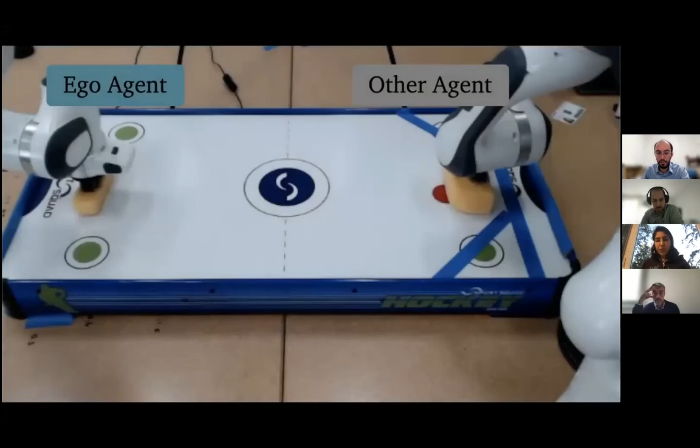So the assumption that we're putting in here is that there exists a low dimensional representation that captures the interaction. And if I learn that, I can also capture the interaction and I can coordinate better. And I can even use that for better adaptation when I think about coordination changing over time, like Bob and Alex getting better at the construction task. And that brings me to this work that I'd like to talk a little bit about. And after that, I'm going to switch to Erdem to talk about learning from interactions.

All right, so the setup that we started looking at was a robotic setup. We have two robots that are trying to play a game of air hockey with each other. I have a robot that I'm calling an ego agent, so this is the robot on the left. And I have another robot that I'm calling the other agent. The reason I'm calling it other agent is that the paradigm I'm talking about could actually work in both collaborative and competitive settings. There's nothing special about this that could only work in collaborative or only in competitive settings. So I don't want to call it an opponent or partner. I'm just calling it other agent.

And we're getting these two arms to play a game of air hockey with each other. And the policy of the other agent is actually high dimensional, right? The robot arm has 7 degrees of freedom. Each degree is a joint angle that lies in a continuous space.

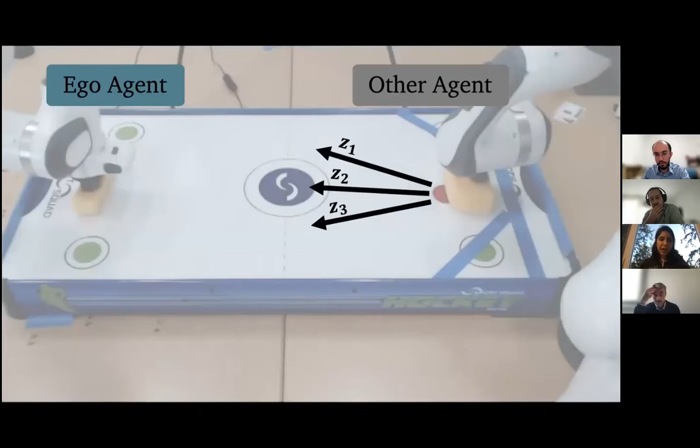And the thing that this ego agent is really observing is not even that, but if it were to observe the actual actions of the robot arm, it would be high dimensional. And if it wanted to do belief modeling over that, it would be over a very high dimensional space. But at the high level, I'm telling you that this other agent is pushing the puck towards the left or right or the center. This ego agent doesn't know that, right? It doesn't really even observe that.

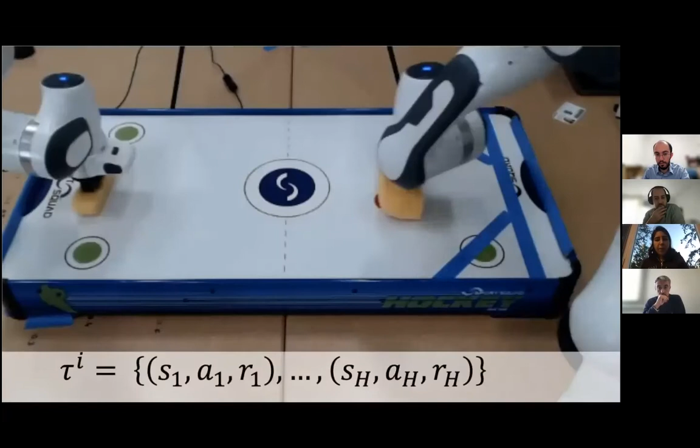But I'm telling you guys that the other agent has this policy that has this low dimensional structure in it. It's pushing the puck to the right, center, or left. Okay? And what the ego agent observes instead is a trajectory. It's a sequence of states, actions, and rewards: states of the world, its own actions, not even the actions of the other agent, but it also sees the reward. If I was able to block the puck, or what is my distance to the puck? And that is what the ego agent observes over some particular horizon, some particular episode.

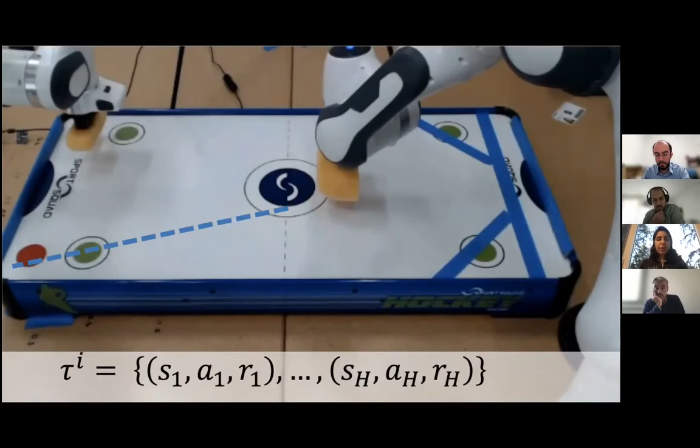Okay? And then this other agent, as I was telling you, has this low dimensional representation. Its policy is pushing the puck to the left or center or the right. And the way it decides is based on what happened in the previous time step. So if the ego agent was able to block the puck, it's going to push the puck towards a different direction. So it has a very simple policy. But again, the ego agent doesn't really observe that.

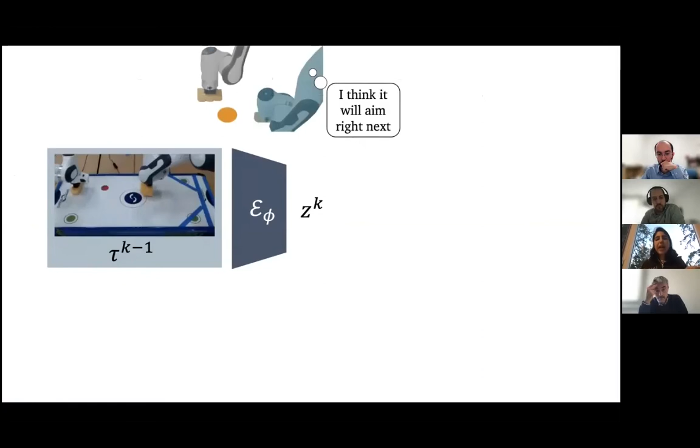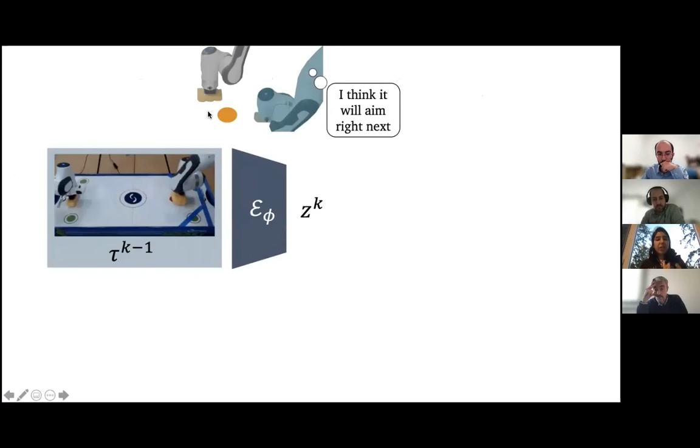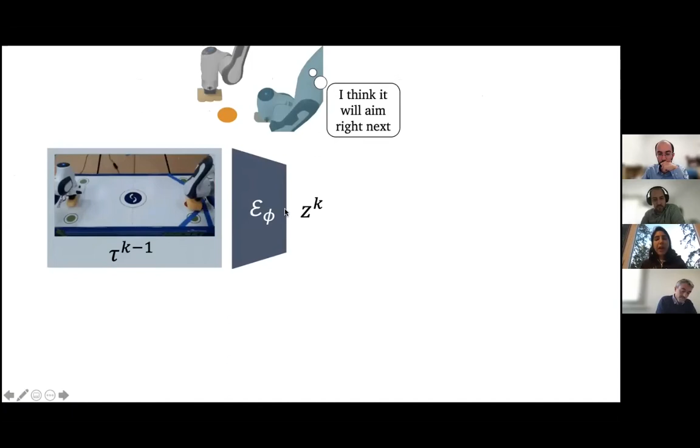So what we are proposing here is to get the ego agent to actually learn this high level representation that I was talking about. The way we can do that is we can look at a previous trajectory, an episode at time step k-1, and try to encode that into a low dimensional representation, Z_k here. And I'm calling this Z_k a latent strategy or latent intent because it's a low dimensional representation of what the other agent is trying to do. This is what the ego agent thinks the other agent is going to do next. Is it going to push the puck to the left or center or the right? That notion of left, center, and right is the thing that's going to be captured by Z_k.

And how do we actually ensure that that will be captured by Z_k? Well, we're going to try to decode this Z_k into the next trajectory, into a prediction of what will happen next. So our learning objective here is really a prediction loss. We look at a previous trajectory, we try to predict what will happen next. And for me to be able to predict what will happen next, I need to know the state, I need to know my policy. Those are the things that I already know. But I also need to know how the other agent is acting and how the other agent is influencing the state. So I need to know the policy of the other agent.

So that is the thing that is going to allow me to really predict the future. But I also enforce that representation to be low dimensional. So I capture the sufficient information, the sufficient statistics about the other agent through this representation learning component. Okay, so that's really the key idea of this work. Once I have that representation, I can use it however I want, right? I can use it in any planner. I can do model predictive control with that representation, or I can have any other controller that uses that representation.

What we decided to do was reinforcement learning. So for our planner, we decided to have a reinforcement learning component that tries to come up with policies for our ego agent. And this reinforcement learning component is maximizing the expected return, but this expected return is dependent on the representation that we have learned so far, a representation of the latent strategy of the other agent. And this algorithm is called LILI, Learning and Influencing Latent Intent. The idea of it is to iteratively train a reinforcement learning agent that's trying to come up with a policy for the robot, and a representation learning component that's trying to capture what the other agent is trying to do.

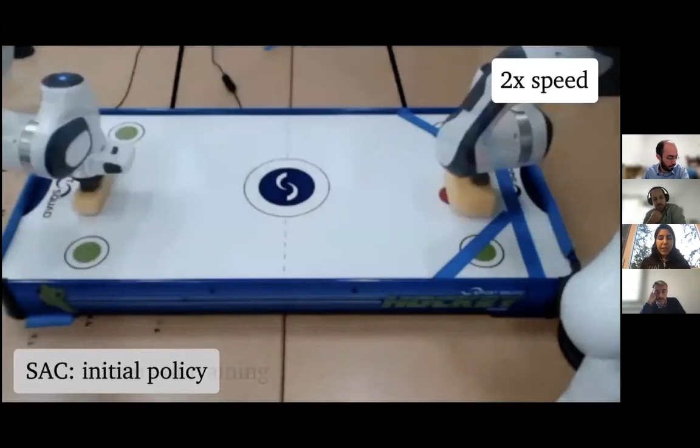So if I were to use, let's say, soft actor critic, state-of-the-art reinforcement learning, after 4 hours of training, it's able to learn how to block a puck. It generally just learns blocking a puck. If it goes towards one direction, it's able to block the puck. But it doesn't model the other agent, it doesn't capture a representation of the other agent. And because of that, it always goes towards one direction. So for example, in this case, it always goes to the left.

And in terms of success rate, soft actor critic is around 40% success rate. It always blocks to the left in this case. It should really be like 0.33 success rate, but it gets lucky 40% of the times, and it's able to block the puck in those settings.

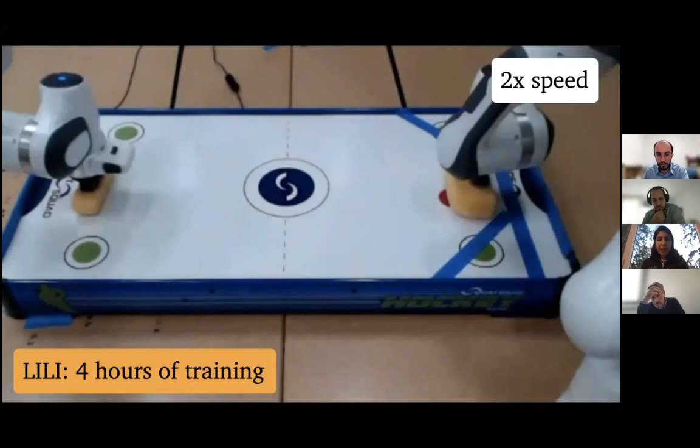But if you're using our algorithm, LILI, after 4 hours of training, LILI is able to actually predict a model of the other agent, predict this latent strategy, a low dimensional model of the other agent. And based on that, it's able to block the puck, and it gets a success rate of around 90%, which is pretty good. Okay. All right, so that's all great, right?

So I've talked about learning representations. One can really think of this as an orthogonal perspective to that game theoretic modeling, in these more reactive policies. We are learning a low dimensional representation, and that captures the model of the other agent. And using that, we are able to train a reinforcement learning agent that can coordinate.

But one interesting point that I also want to mention here is that I can go beyond reacting to other agents. I can go beyond simple coordination. Specifically, if I optimize for a long horizon objective, I can maximize, for example, expected return across multiple interactions, and that would allow me to influence other agents. So not only can I coordinate with them, but I can get them to act in specific ways that are useful for me, that can help me as an ego agent to play better, win the game more, get higher rewards, and so on.

And I want to briefly talk about this idea of influencing. Here, the way we are doing influencing is by just considering a long horizon objective. So instead of considering my original objective, I'm now considering it across multiple interactions, and that could get me higher rewards. So as an example here, we are able to influence the other agent, this robot, to push the puck more often to directions that are useful for us.

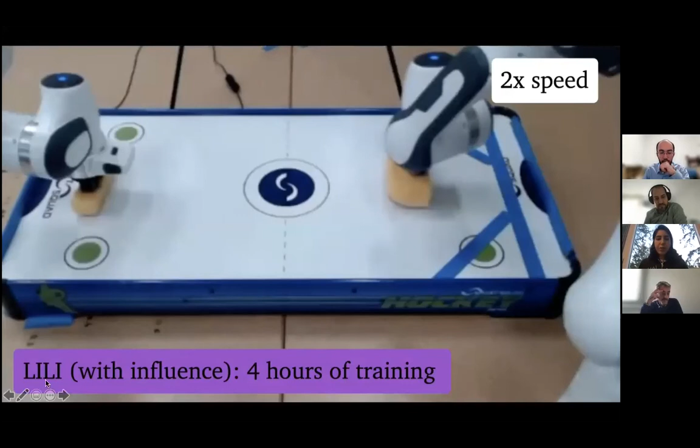And we kind of see that in this other paradigm, the air hockey paradigm, right? The thing that we get is that the puck is more often pushed to the left. That is the way of influencing that we are seeing here. Okay? All right, so that's all great, but one other interesting point is that influencing can allow us to solve reinforcement learning problems in a more effective way.

So in a recent work, I want to very briefly mention this, and then I'm going to switch to Erdem. This is a CoRL 2021 work. What we are looking at is influencing to actually help with reinforcement learning and multi-agent reinforcement learning problems. One of the biggest challenges in multi-agent reinforcement learning is the non-stationarity of the environment, specifically the non-stationarity of the other agent. Multi-agent reinforcement learning is notoriously harder than single-agent reinforcement learning, because you need to model what the other agent is trying to do.

And this idea of learning latent representations is trying to have a more efficient way of capturing that. What I've talked about so far with LILI is, let's try to learn representations, because that is a more effective way of capturing that non-stationarity. But the interesting thing is with influencing, maybe you can remove that non-stationarity fully, or maybe you can reduce that non-stationarity.

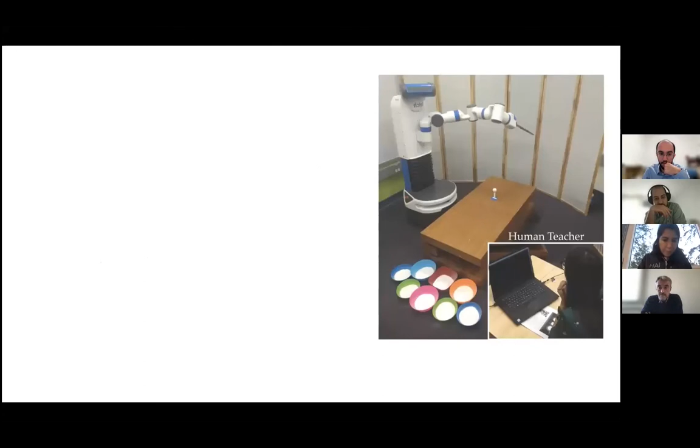So far, I've basically talked about this idea of learning and influencing interactions. But in the second part of the talk, what Erdem would like to talk about is this idea of learning from interactions. So if you think about it, if you have a robotics agent, that robotics agent can learn from human demonstrations, but it can also learn from many other sources of data and leverage those different sources of data to actually be able to coordinate and to learn various types of policies. All right, so with that, let me stop sharing and I'm gonna let Erdem take over.

Okay, thank you, Dorsa. So as Dorsa mentioned, we want to learn humans' underlying reward functions through some interaction. And our insight here is that it might be difficult to get data from humans, but humans leak information everywhere, and maybe we can be a little bit smarter about how we are collecting data from them. Let's think about a robot trying to do a task like picking up an object, as in this picture. Ideally, one way to achieve this is to write out a reward function and ask the robot to optimize it. But this is often difficult because these reward functions are not easy to design by hand.

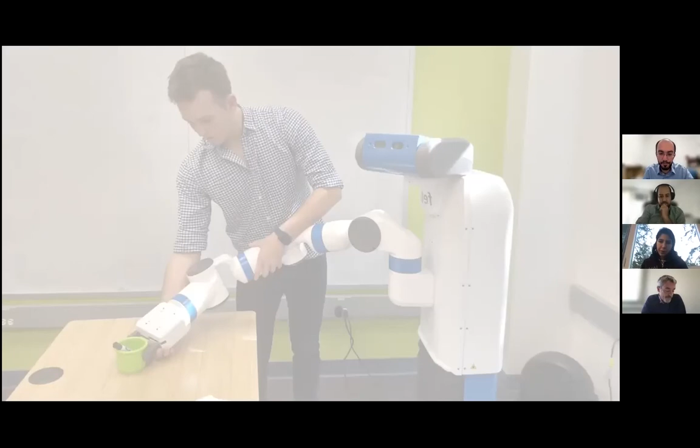And another way of doing this is to have a human provide a set of demonstrations on the robot and ask the robot to try to imitate this human as closely as possible based on their demonstrations. This idea is often known as imitation learning or learning from demonstrations, and it has been around for more than 2 decades now. And most of the field has been looking at this idea of learning reward functions from expert demonstrations, where we assume access to an expert who can provide us with a large number of demonstrations that are almost perfect. And then the robot can basically imitate those demonstrations, and that's it, we are done.

But in reality, we don't really have access to these perfect expert demonstrations. If we want to train with humans, we are not going to be able to ask the humans to provide us that much data or provide us near optimal expert data. In reality, we have access to a lot of offline suboptimal data or observations, like YouTube videos of people doing things, and that's not necessarily expert data. Or we have access to other types of data, like language instructions or narrations. And in addition to that, we have access to a variety of other data sources.

As an example, we can think of pairwise comparisons or rankings, where we would ask humans to rank a bunch of different trajectories instead of asking them to provide us demonstrations. And if you think about this robot as an embodied agent in the world, I can actually move it around and I can provide physical corrections. So the thing is, we often do not have access to expert demonstrations, but we have access to many other types of data. And we can actually be much smarter about how we are collecting data from these different sources. And that's the insight we are trying to use here. And in this talk today, I'm going to specifically talk about pairwise comparisons and more generally rankings. So how can we learn from them and how can we be smarter about how we collect data?

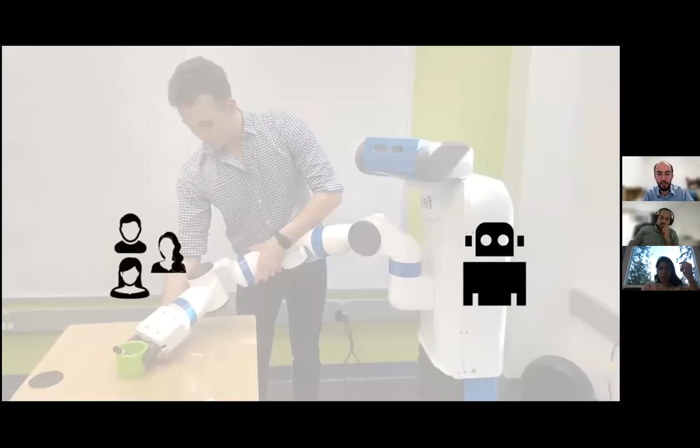Okay, so we now have a way to actively learn unimodal linear reward functions. In learning from pairwise comparisons, there have been many works that focus on learning unimodal functions, including the work that I've just described, and many others that study different acquisition functions for active querying. But what if the data come from multiple users who have different reward functions, and our robot doesn't know any of them? It doesn't even know who provided the data.

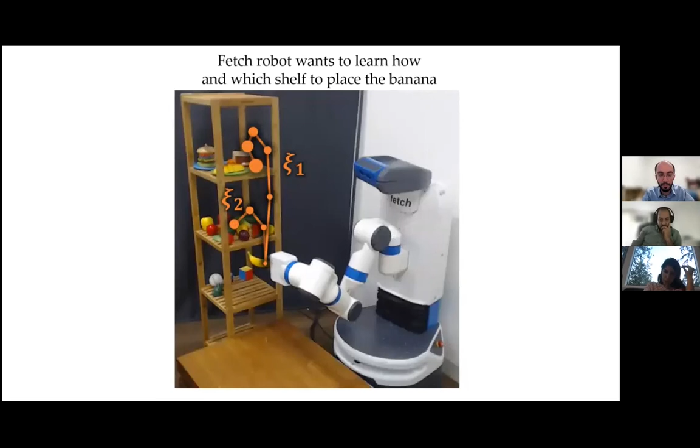We investigated this problem on a home robotics task where we can safely collect some data. And here the Fetch robot wants to learn how and which shelf to place the banana. Perhaps a user comes in and says they prefer the first trajectory over the second trajectory. It's no problem, Fetch can handle it because it knows how to learn unimodal rewards. But if a second user with different preferences shows up, then Fetch will fail. And in fact, it's doomed to fail. Let me explain why with a numerical example.

So we have two trajectories, xi1 and xi2. This first user comes in, and let's say their reward for the first trajectory is 2 and 1 for the second trajectory. Following prior work, we model the user's comparison response with the softmax model. So the probability that the user chooses a trajectory is proportional to the exponential of its reward. This model would give us these probabilities. Now, we also have the second user with different rewards and preferences. And let's say the first user provides 20% of the data and the second user provides 80%. Combining these, our robot would observe a data set that's 24% in favor of the first trajectory and 76% the second trajectory.

Now, the problem is, I can come up with another pair of users whose rewards and preferences are different, such that with different data frequency, they also provide the same data. So our robot is only observing these data at the end. So from its perspective, these two settings are just indistinguishable. It would have no way of identifying the underlying true rewards. In fact, researchers in ranking theory proved that you can always construct examples where learning multimodal, even bimodal rewards from pairwise comparisons is impossible. So are we done?

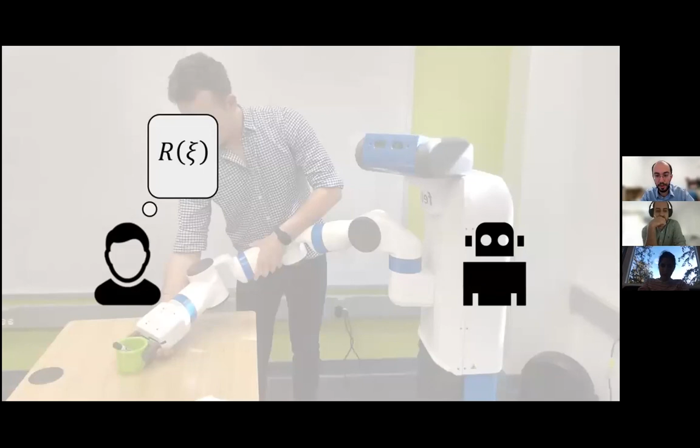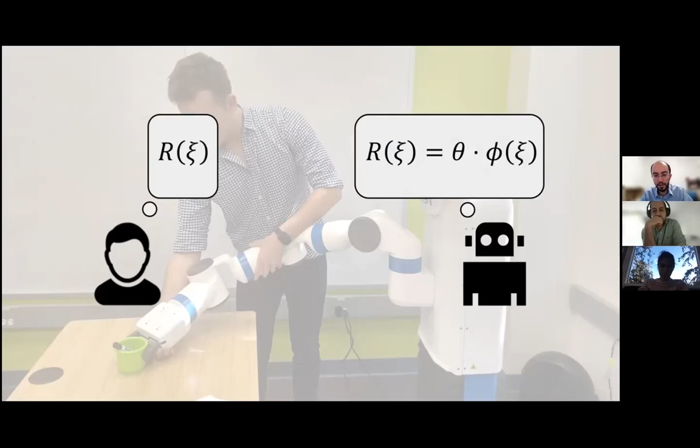All right, so going back to this picture, we now know how to relax the unimodality assumption. And the other fundamental thing that I've been assuming is that the robot is trying to optimize a reward, which is a linear function of a set of features, or a mixture of linear functions in the multimodal case. But in reality, these reward functions are not always a linear combination of a set of features.

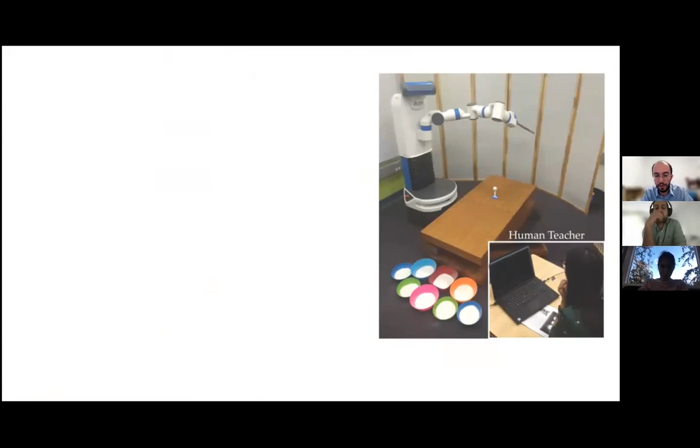Here's an example of that. Imagine we again have this robot and we wanted to play a version of mini golf. We wanted to get this ball into one of these targets. And I want to do that by using preference-based learning, where I have a human teacher and then I can show different trajectories. I'll ask the user which one of these trajectories they prefer. And based on that, I'm going to figure out what they want.

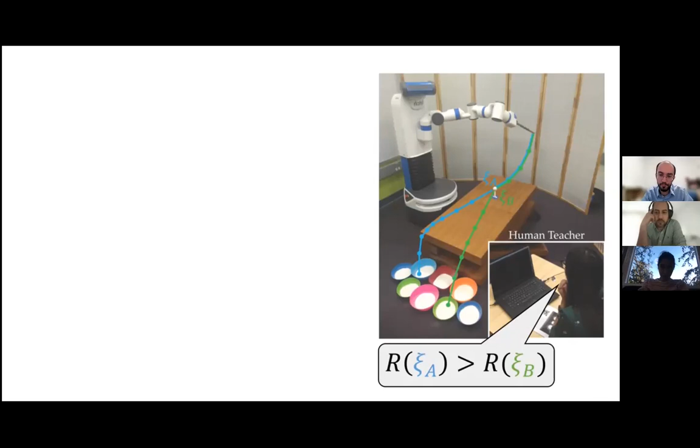And these are hyperparameters, right? They're highly tuned, and in general, they're very well designed to make sure everything runs okay. And that basically tells us that designing features might get extremely difficult here.

One question you might ask is, why are we even designing features? Why can't we just use neural networks? The whole point of deep learning was to get rid of feature generation and be able to use neural networks to automatically generate them. But remember, I cannot train with humans in the loop if I'm using deep learning, because that's just not going to scale. When I have too many parameters, even if I'm doing active learning, it's going to be too difficult to actually get enough training data from humans.

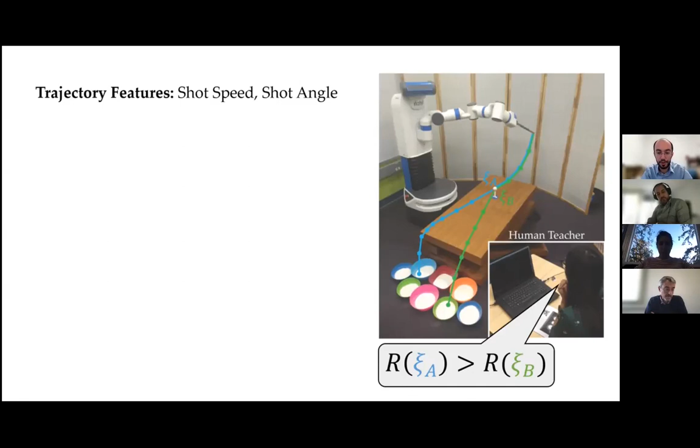But with these features, I'm going to be able to target only the corners of this space. I'm not going to be able to hit any of these targets, actually, because the linearity assumption will cause the robot to either minimize or maximize its shot speed and shot angle. On the other hand, if I model the objective as a nonlinear function of these features, even if my features are simple, I should be able to hit the target I want.

So basically, our insight here is to not have a deep neural network and not have a linear function of features, but instead be able to model a nonlinear function of features that's able to actually cover this full space and differentiate between different targets.

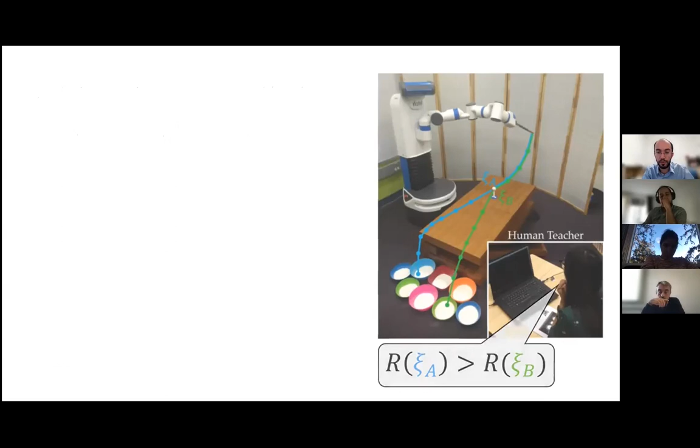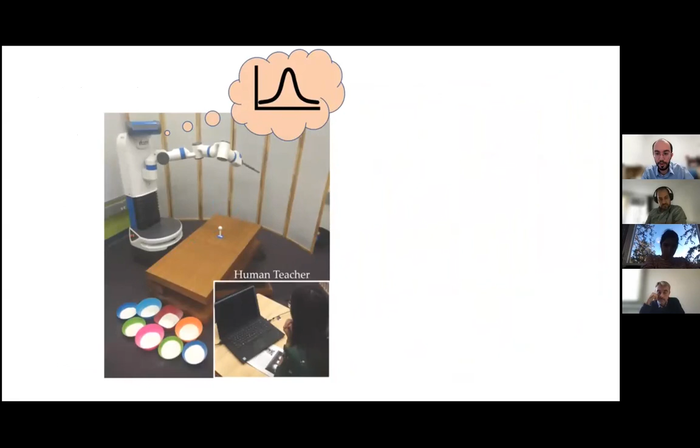So in particular, we are going to use Gaussian processes for this. Let's now look at how our framework works. The robot will keep a Gaussian process as a model of the human's underlying reward function. And using this model, it will generate the query that will give the highest expected information gain. Of course, I'm skipping the mathematical details here.

And after it decides to query, it will show the trajectories to the user, and the user is then going to respond to this query. We will store this response in a database. And here we are again using a noise model for human responses, just like we did in the linear reward case. Depending on how close the rewards are to each other, we produce probabilities that are close or different.

And using this noise model, the responses in the data set will give us a likelihood function, which we can use for fitting the GP. It actually doesn't fall into the class of GPs, but we can use, for example, Laplace approximation to cast the posterior as a GP. And the process will then repeat using this new posterior.

Okay. Let's first start with looking at some queries made to the user. So this is from an actual user study. Here, I'm showing you an information optimal query where we model the reward as a linear function of features. As you can see, the robot hits the ball to the boundaries because it believes one of the extremes must be optimal.

However, we can significantly improve expressiveness of our queries if we model the reward using a Gaussian process. As you can see in these video clips, the robot can now hit the ball to the different regions. So the GP modeled reward enables the robot to explore a broader range of trajectories. Okay, so those were some example queries.

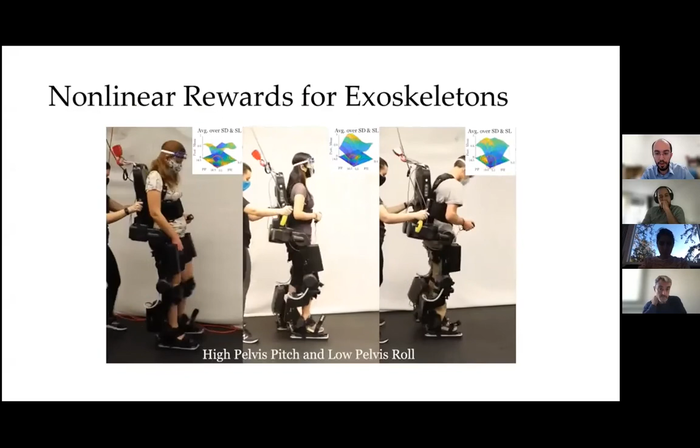We need to model the human's preferences or reward function as a nonlinear function because humans do not necessarily like the maximums or minimums of these parameters. And perhaps more importantly, some gaits may feel unsafe for the users, and we need to avoid that even while we are learning their preferences.

With our preference-based GP regression model, we were able to both model and ensure this safety constraint and learn personalized, nonlinear utility functions at the same time. And this is an important step for the science of walking, as we can now better understand the gait preferences of the users.

All right, just to summarize, we have been talking about using these pairwise comparisons and rankings as a way of learning reward functions. And in general, I want to emphasize again that people leak information and they give us information in different forms, such as physical corrections or pairwise comparisons, and we can try to learn from these different sources of data. With that, I would like to pass it back to Dorsa.

All right, so I'm not going to share screen anymore. I just wanted to wrap up and summarize what we have talked about so far. So the way I started talking about this problem of interaction was using learning for better interaction. So we talked about learning low dimensional representations that can help us coordinate and collaborate better or even influence agents. And in the second part, what Erdem talked about was learning from interactions.

And he specifically talked about pairwise comparisons and rankings as a particular form of data that we could collect from humans, and problems such as nonlinearity or multimodality of reward functions when we try to learn these types of models from this type of data. So in general, I think learning from interactions for interactions are pretty interesting problems, lots of open questions there. And with that, Erdem and I can take any questions.